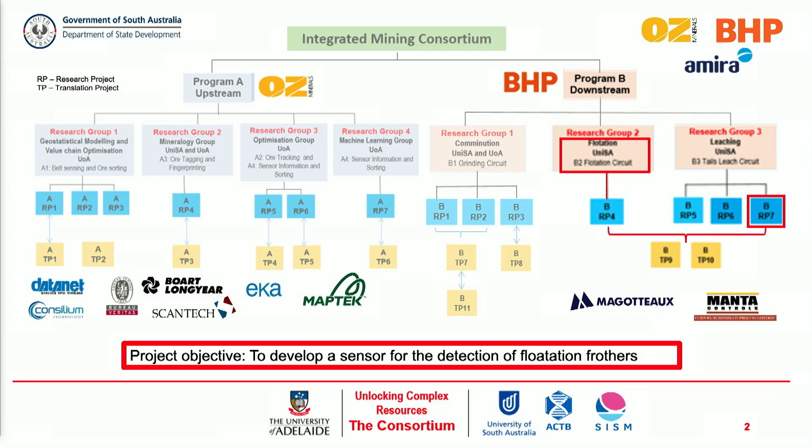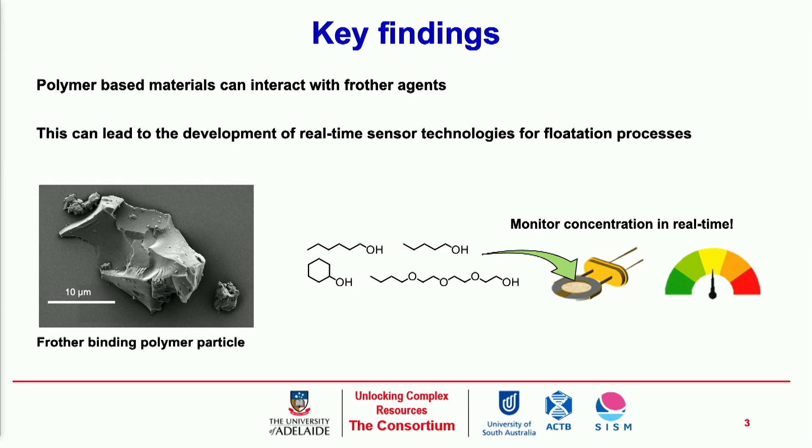the development of a sensor for the inline monitoring of froth flotation agents in flotation processes. So to date, the key findings of this research are that we are able to develop materials that interact with these key components of frother mixtures through an adsorption process. We've developed a series of polymers that we're evaluating for their binding properties to these components, and we believe that this will lead on to the development of a successful coating for a Quartz Crystal Microbalance platform for real-time monitoring of these components in flotation processes.

So briefly, an overview of flotation to a population of people who know more about it than myself. Basically, you have a bath full of bubbles, which are decorated with these hydrophobic components, and you have binding of copper sulphide minerals to these bubbles as mediated by an ethyl xanthate collector.

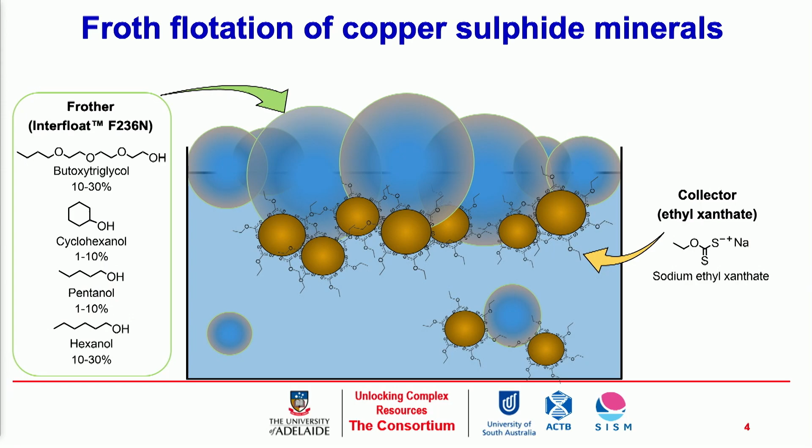What we rely on in how we're going to tackle this problem is based on molecular complementarity. So we want to develop a system where we have complementarity between the binding properties of our target molecules and the polymers that we create.

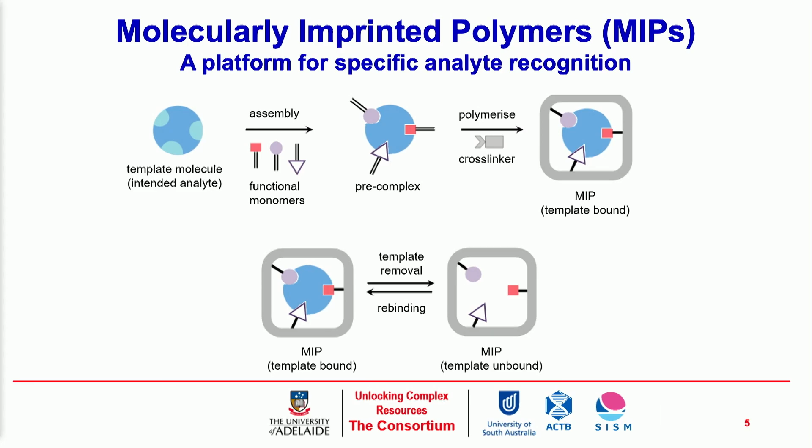And a typical way of achieving this within food industries is to employ molecularly imprinted polymers, where you'll take a template molecule and you'll select compounds that interact with key features of that molecule, and you'll polymerize a backbone based on that to form these sockets that will bind these components in solutions and allow for sort of gravimetric analysis if you then adopt that onto a QCM through a mediation of binding and desorption from these materials.

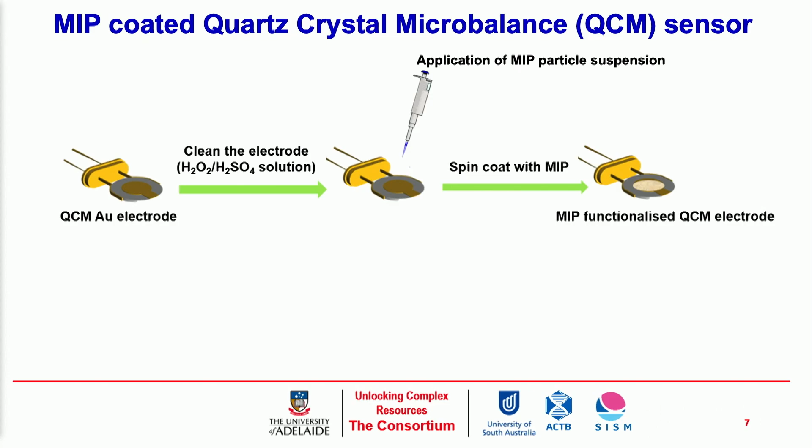So that's the central premise for how the materials in this project work. And then with successful materials being made, moving forward, we will coat these quartz crystal microbalances, and adsorption of these key molecules within the flotation baths with the substrate surface will induce a difference in the frequency of this monitoring system, which can be correlated to concentration in real time.

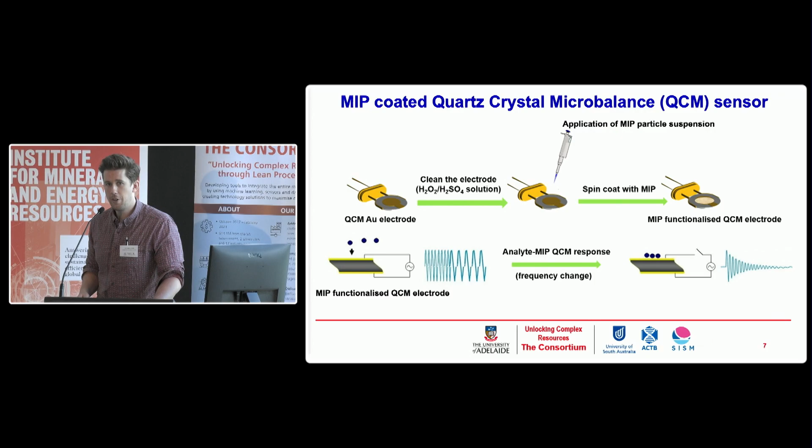However, the compounds that we're targeting here within the interfloat frother mixture are quite simple. They don't feature distinct chemical handles that have a high degree of specific complementarity to available monomers when we're designing and creating these polymers. Instead, they're typically straight chain or cyclic alcohols or polyglycols that feature a hydrophobic component. So really the only handle that we have to work here is their hydrophobicity.

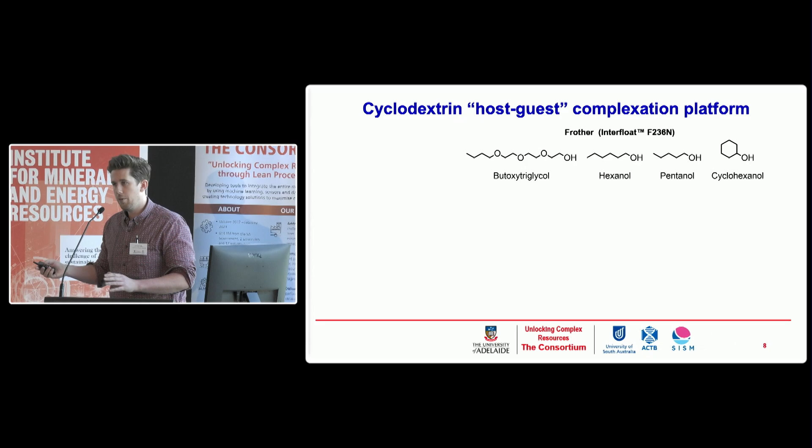Some other work that I do on medicinal chemistry projects uses cyclodextrins as a platform for various reasons. These are no strangers to the pharmaceutical industry. The benefit to using cyclodextrins is that they are polyglycosidal macrocycles, and they have a hydrophobic cavity orientated towards the inner circle. So like a hoop with a sensory ring in it that is going to bind each of these things. On the outside is a very hydrophilic rim that allows for access of simple chemistry to add on clickable handles

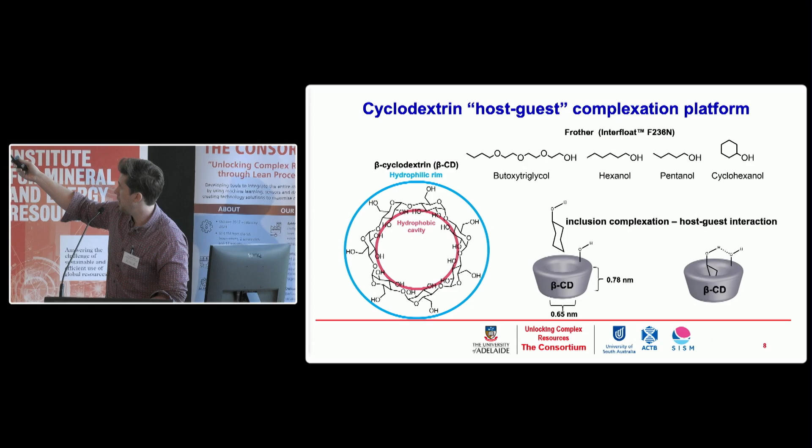or polymerizable groups. So we were able to take this as a platform and produce a material that's going to be able to interact with these components based on the formation of hydrophobic inclusion complexes, as demonstrated here with the binding of cyclohexanol within the cleft of beta-cyclodextrin.

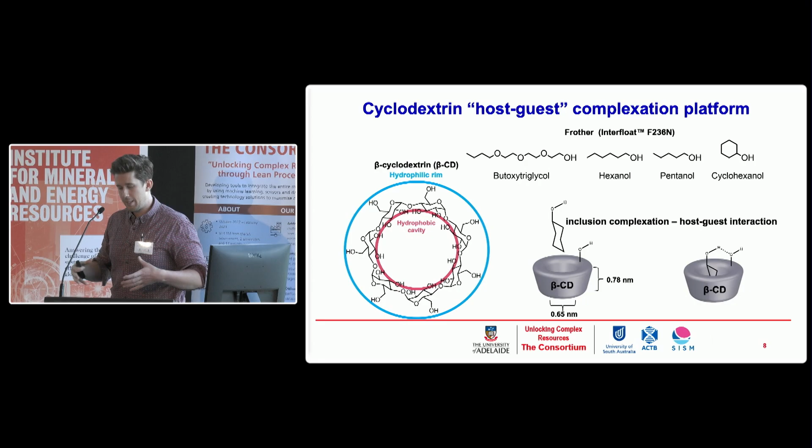Cyclodextrins have different sizes depending on how many sugars are in their ring. Beta-cyclodextrin was selected as we believed it had a good size complementarity to cyclohexanol, and we were kind of hoping that we might get some degree of selectivity for that component just based on that steric bulk. We didn't really achieve that, but that's life.

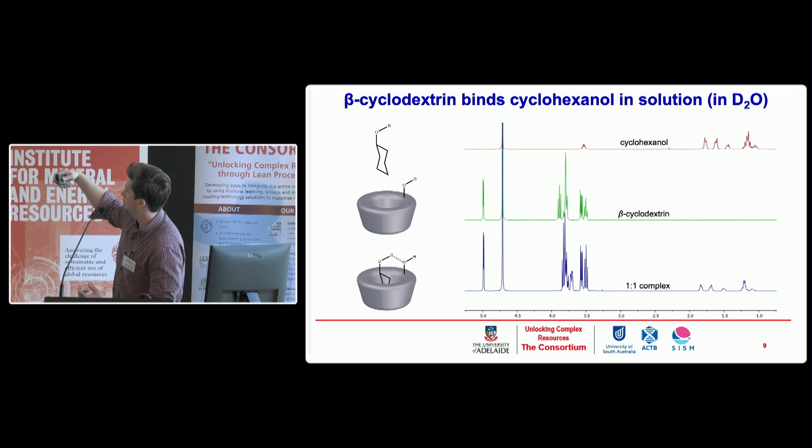So here's some nuclear magnetic resonance spectra of beta-cyclodextrin and cyclohexanol, and these are just to demonstrate the principle of binding. Basically, in the red trace, you have the protons relating to cyclohexanol. In the green, you have beta-cyclodextrin. And then when you mix them together in blue, you can see a shift in key resonances which correlate to the H3 and H5 protons of the sugars within the ring that make up the hydrophobic surface of beta-cyclodextrin. This is a means of confirming that you have complexation with your host molecule, your guest molecule within your host.

So we screened all the components that are in the Interfloat mixture and could determine that of the 4 that we're targeting, they form these complexes.

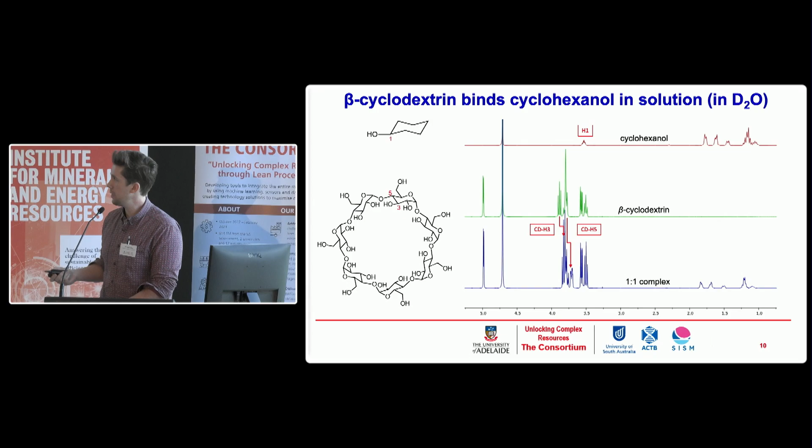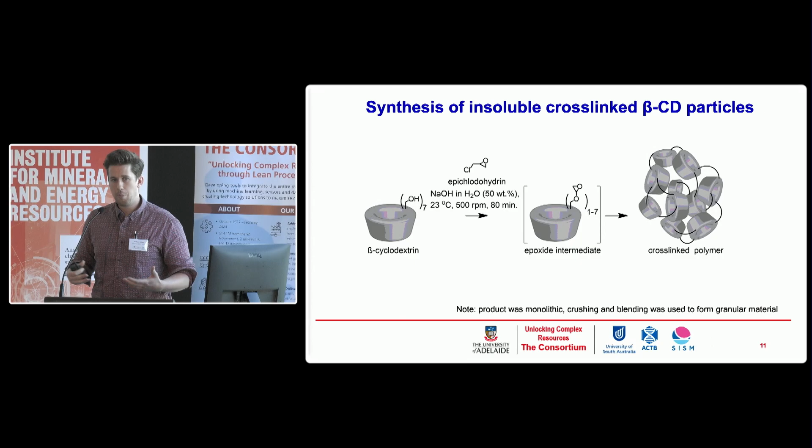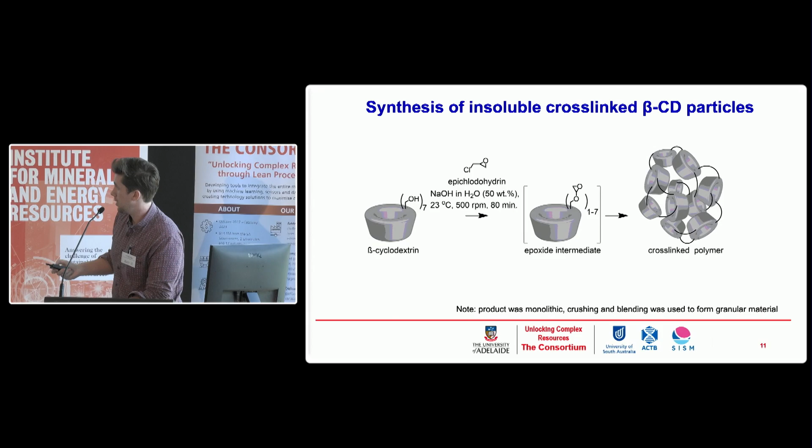The next step is you need something that won't just dissolve in water like beta-cyclodextrin does, and you need a viable material platform that can be taken forward for binding and development onto the Quartz Crystal Microbalance system. To do this, I formed a highly cross-linked polymer network using epichlorohydrin, creating a reactive epoxide intermediate from the beta-cyclodextrin unit, forming this highly cross-linked but porous, water-insoluble polymer, which looks like this on the right-hand side.

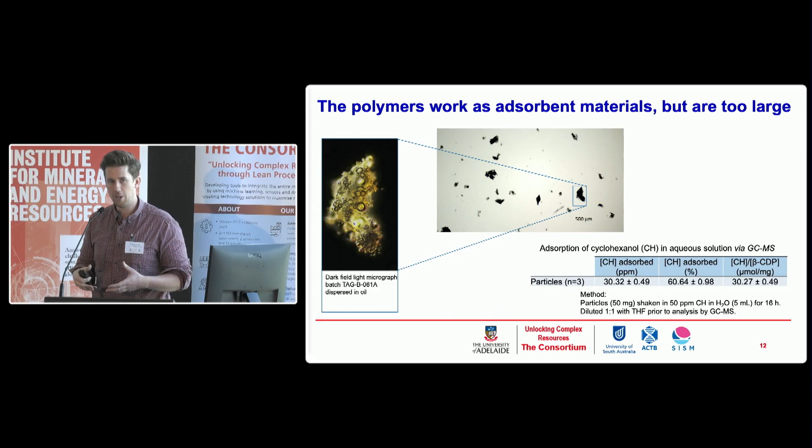When we first made these, it was produced as a large monolithic structure, which required a lot of grinding. It was hard to work with, and these were quite large, which ultimately wasn't suitable for further adaptation down to the Quartz Crystal Microbalance system.

But we started to evaluate their adsorption properties, and we can see that they're interacting with the components we want at a scale that would be useful.

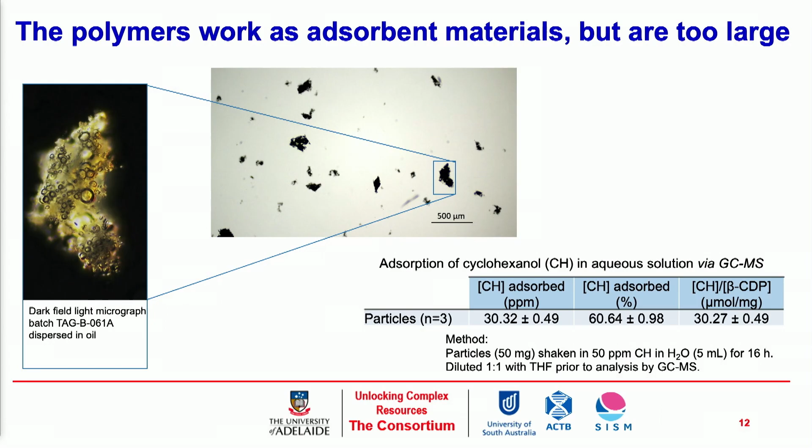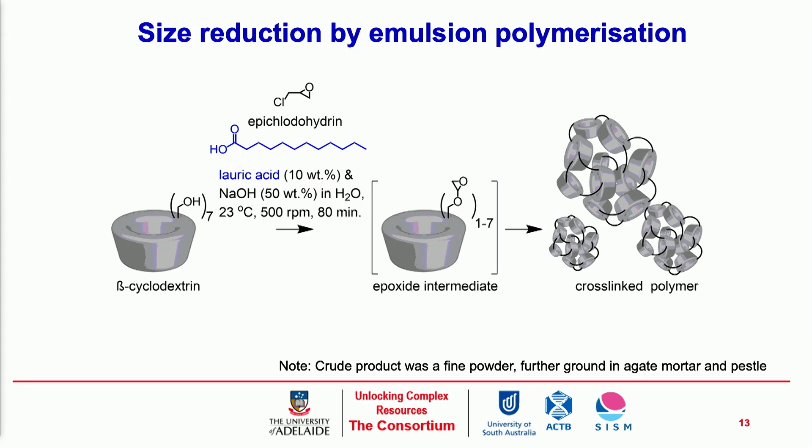So the next step was to try to reduce the size of these particles. I introduced an emulsifying agent, lauric acid, into the synthesis, and was able to form it as more of a particle suspension. So rather than getting a big block at the end, I got a collection of fine powder.

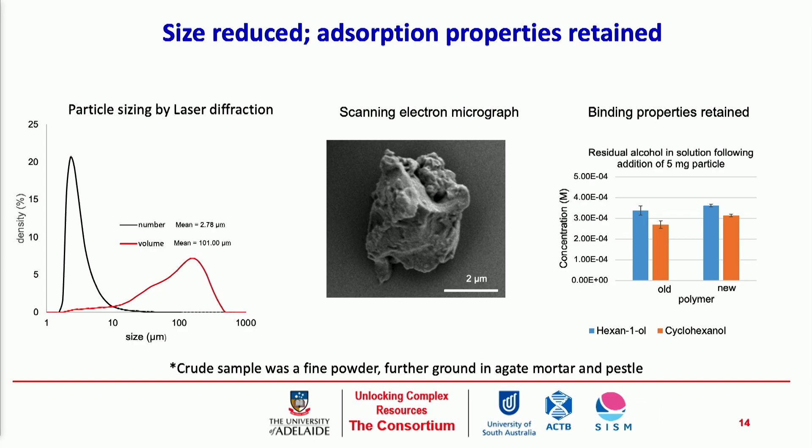The properties of adsorption are retained in these polymers, and with ongoing work we're trying to reduce the size of the platform, still using cyclodextrins, to achieve smaller particle sizes. We've been evaluating them under different conditions like temperature and pH, seeing how that might modulate selectivity for individual components of the Interfroth mixture. With future work moving forward, there are several things to be achieved.

Ultimately, I'll continue to evaluate the performance of these sorts of materials. Overcoming size constraints is still a major consideration.

To tackle this, I've recently been producing magnetic nanoparticles decorated with beta-cyclodextrin. This drastically reduces the size of the platform, but they retain the same adsorption properties, and you also have the benefit of being able to handle them magnetically, which can be a great benefit for processing time when evaluating these materials.

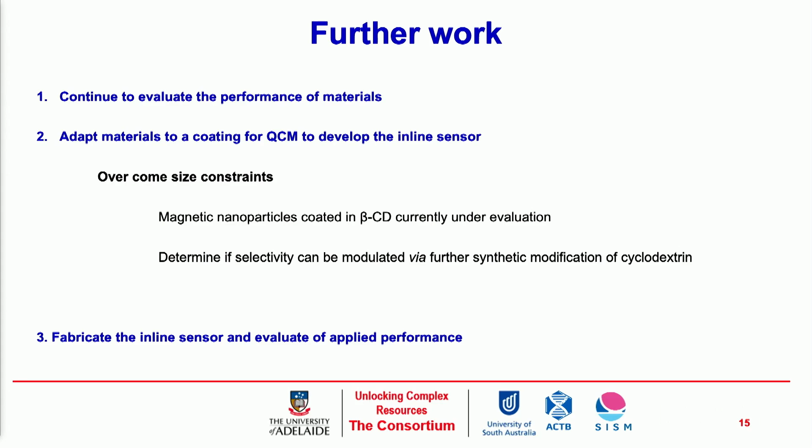I then need to determine if selectivity can be modulated somehow for these systems. It may be a limitation if we're detecting too many things at once within a solution, so having some selectivity for individual components would be a benefit.

I may be able to achieve this by possibly substituting out the cyclodextrins or modifying their rim to cause some sort of exclusionary basis for selectivity. Once we have a suitable material, we'll then move towards fabrication of the QCM for inline sensing and assess its performance.

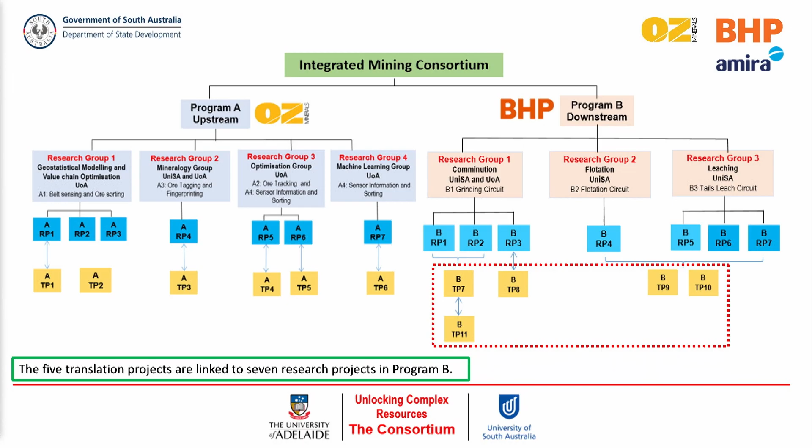But with current advanced techniques and instrumentation, we can develop more sophisticated approaches which simplify the human-process interface and help maximize metal production. In Program B, we have 5 translation projects linked with the research projects in the consortium that you've heard about throughout the day. These projects span from the grinding circuit down to the tailings circuit and are led directly by our translation partners, Manta Controls and Magotteaux. The first two, TP7 and TP8, are led by Manta Controls, and projects TP9, 10, 11 are led by Magotteaux.

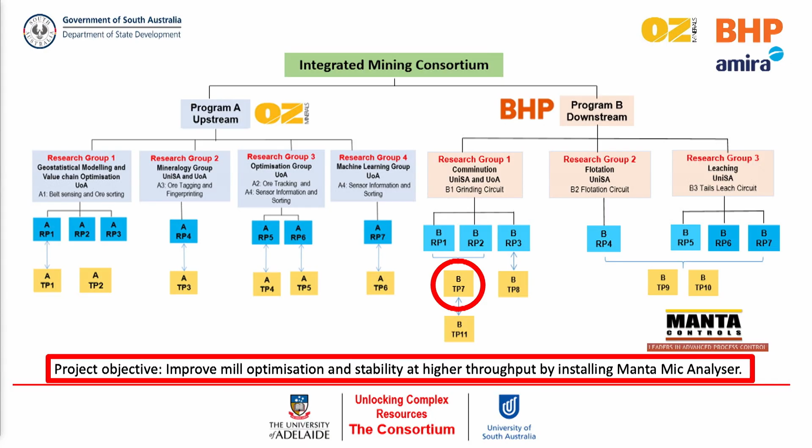Within the comminution group is translation project 7, focused on improving autogenous and semi-autogenous grinding through optimization and stability of the process, and maximizing mill throughput by installing an acoustic sensor, specifically the Manta mic acoustic analyzer, in the grinding circuit. Why is this important, and what are some of our key findings so far? We've been able to locate a position in the grinding circuit to install the acoustic sensor, which is important because the location determines the information we can get and its usefulness for controlling the grinding circuit.

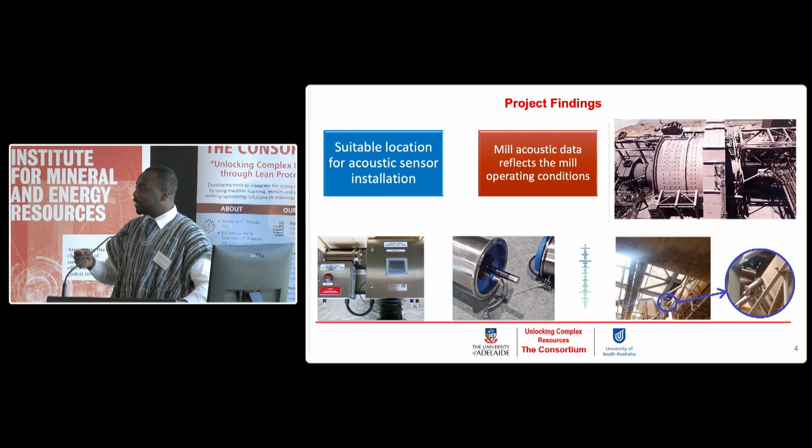We've also done preliminary studies establishing relationships between the acoustic sensor data obtained from Manta Controls, where we have about 33 different acoustic frequencies from operation, and mill operating variables such as mill weight and mill speed, among other things I'll go into further as I go through the presentation.

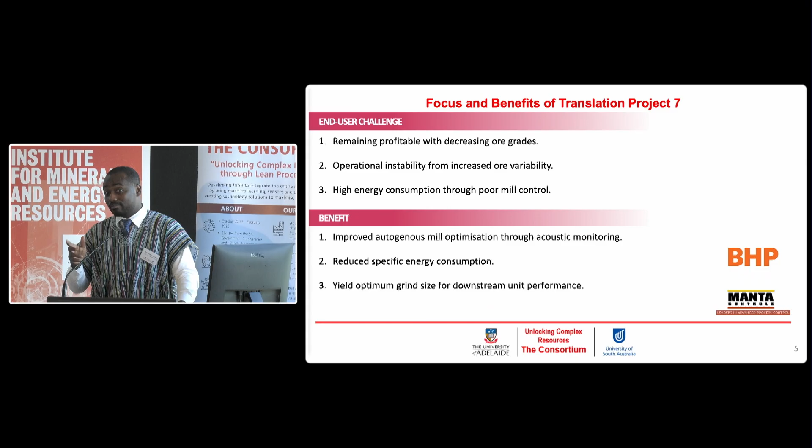So we need to maximize our throughput, which is very important. As was mentioned earlier by Kweku, the grinding circuit represents a very high energy consumption section in the mineral processing chain, consuming the greatest percentage of energy when milling. That means if we increase our throughput, we reduce the specific energy required for that processing.

The other challenge is operational stability. It's very difficult to maintain a stable operation, mainly due to varying mineralogies or ore characteristics fed into the mill. For example, you may have a hard ore fed into the mill and use a specific set of operating conditions. When the ore gets softer, that condition is no longer suitable, so you need to vary it, and that causes instability in the operation.

So sometimes in a typical load-to-power curve, which is used to monitor the performance or stability of the mill, every operator wants to make sure they're working below the point where it tips into the unstable region, so that you don't fall off. That also means you are not meeting the maximum capacity of that particular operation.

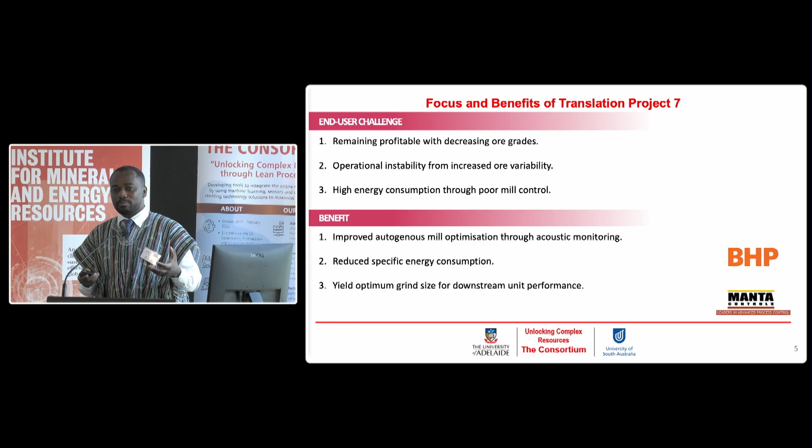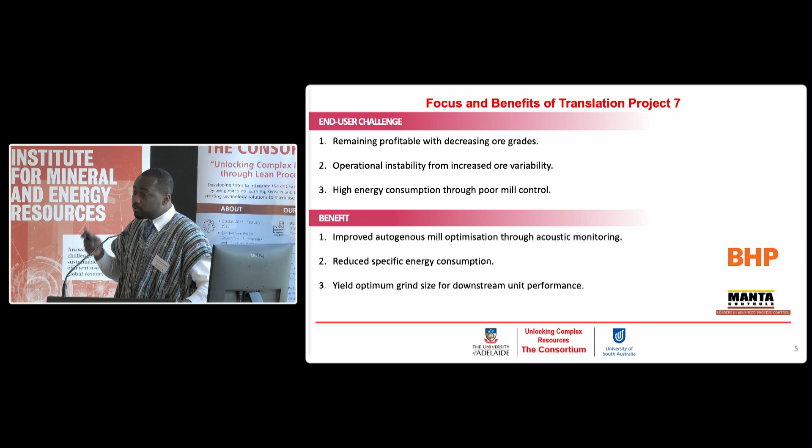These are major challenges, and we're anticipating that by installing this sensor, we can collect useful data to help improve the optimization of the autogenous mill, reduce the specific energy, and achieve an optimum yield of particle size, which is useful for the downstream operation.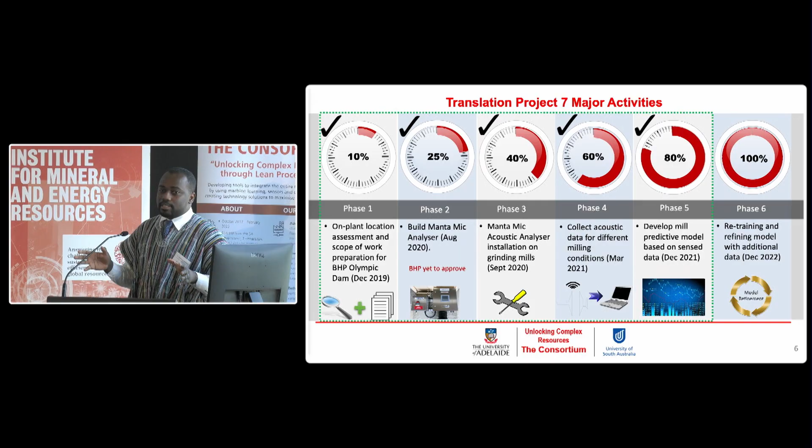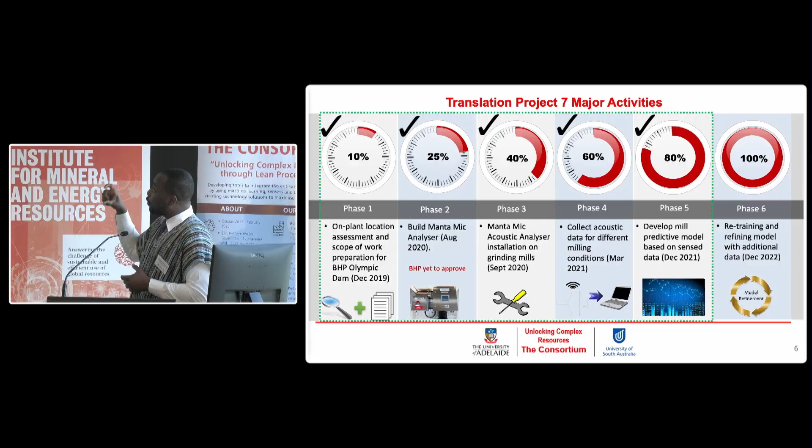This translation project has been divided into 6 major phases. The first is to assess the location on plant, going up to phase 5 where we're currently developing the models. We've done preliminary work on that, and I'll share some of what we've seen.

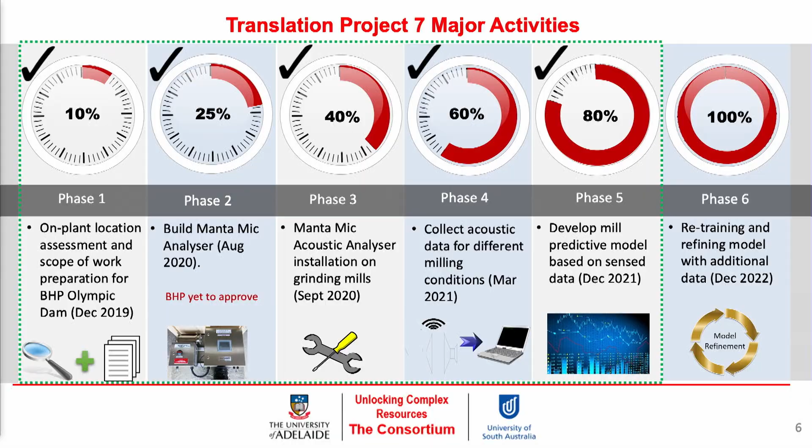Then also to build the Manta mic, install it on site, and collect data from that to use in building the models. Phase 6 mainly involves collecting additional data, refining the models, and getting better information from that.

This shows the location. At BHP Olympic Dam, which has been our main focus, there are 2 primary mills: the Fuller and the Svedala mill. The Fuller mill treats a maximum of about 400 tons per hour of material, while the Svedala mill treats about 800 tons per hour.

So our focus will be on the Svedala mill, and we've assessed that we can have 2 microphones on the mill, one at the eastern and one at the western part, because that mill operates in 2 directions. So when running clockwise, we're still able to get information from the toe of the mill, and when running anti-clockwise, we can still get useful information.

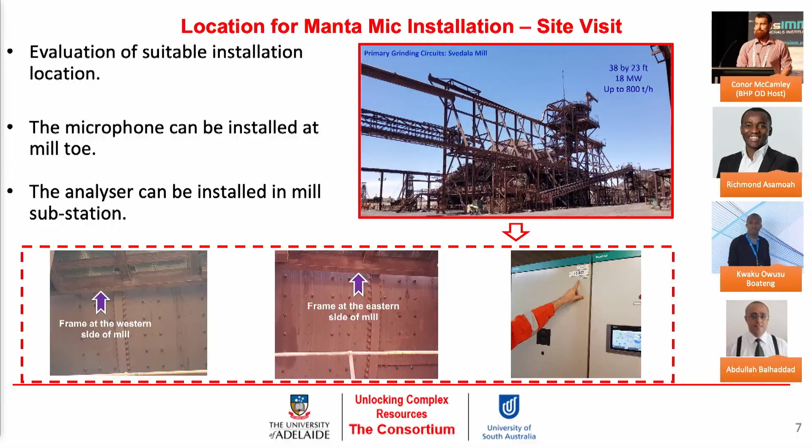For the analyzer, that will be installed in the substation. That was successful. The other thing we've seen from the preliminary data is that we're able to use the frequency data to correlate or link it with the mill operating conditions, such as the mill weight and the mill speed.

That's very important, because some of the things Kwaku shared about changing ore feed characteristics—where the hardness is seen in the acoustic information, or the sizes are seen in the acoustic information—we can now probe further into those regimes or phases and work on plants to get that information.

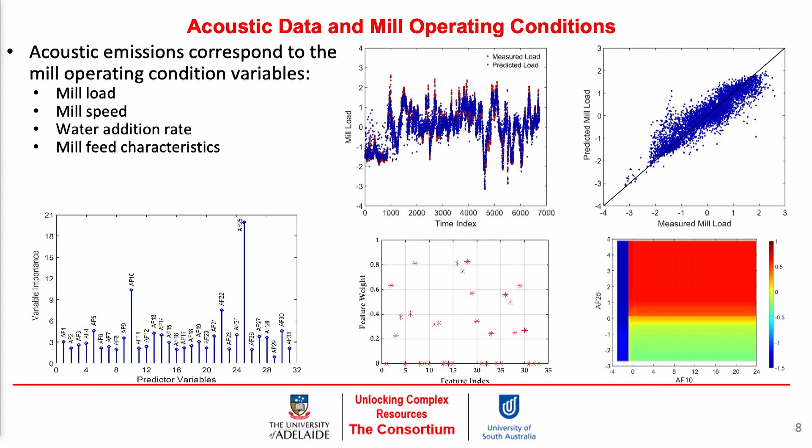So I'll now move, still within the grinding circuit, to translation project 8. This project is also led by Manta Controls, and the focus is to install a particle size monitor on the hydrocyclone overflow.

This is very important because particle size is one of the major variables that every metallurgist knows is critical in downstream flotation, or even if you go straight to the leaching circuit. But monitoring that on site has not been very frequent. Having a sensor that can monitor particle size continuously in real time, and using that information to feed back into the control system, is very important.

In terms of flotation, you are trying to work within a particular range, say 30 to 106 or 150 microns, which is best for flotation based on the mechanical cells used on plant. But when material is too coarse or too fine going to flotation, you end up losing it to tailings. So you have to be able to monitor the particle size.

Usually on site, what is done is you monitor mainly one value, the P80, which is the 80% passing size - say P80 is 75 microns. An operator monitors just that single value and assumes a particular outcome in flotation. But flotation is more sensitive to variation in the distribution of sizes, which will yield a different outcome. So having knowledge of the distribution is also very important, not just a single value.

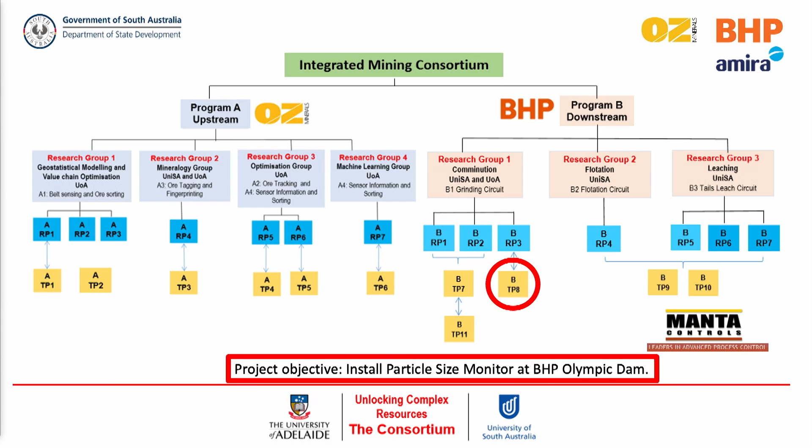On-site measuring of particle size is also difficult because it's laborious and manual, meaning more cost. So having a sensor that can do that is very useful. This is the purpose of this work, and it's directly linked to the research project B3 talk you listened to this afternoon, also led by Manta Controls.

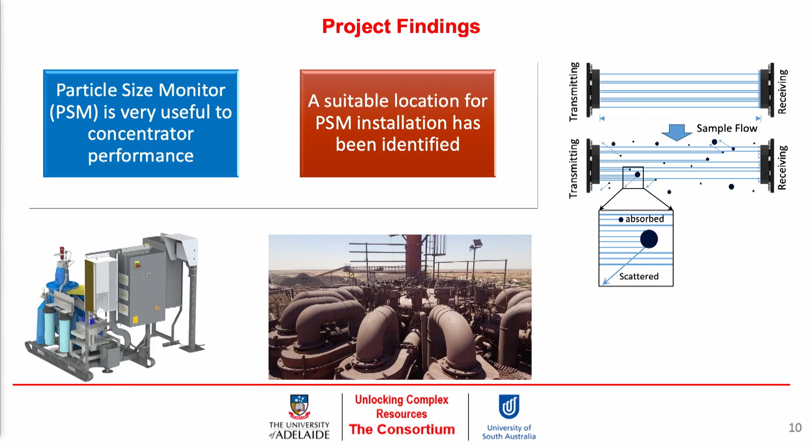So what are some of our findings? We were able to identify a location on plant where we can install the particle size monitor, after searching for a suitable location - I'll show you that in a few minutes. But this work also focused on addressing key end-user challenges.

The first challenge is decreasing ore grades - I won't go back into that since we talked about it earlier. Also overgrinding: in the hydrocyclone, the focus is to separate fine particles into the downstream process through the overflow, and coarse particles back into the mill. When the cyclone isn't performing properly, you end up with coarse particles reporting in the overflow.

That is typically referred to as roping - coarse particles report in the overflow and fine particles report in the underflow, going back into the mill. When that happens, the amount of new feed you can put into the mill reduces, so you're reducing mill throughput and overgrinding that fine particle, which eventually goes to flotation and then tailings because it's too fine to be separated. So you're losing material, losing energy, and spending a lot of money.

Being able to monitor that hydrocyclone overflow is very critical and important. Also, intermittent poor flotation response is a major challenge, because when feed varies based on particle size, pulp chemistry, or mineralogy - as was also mentioned today - you tend to get poor flotation. This challenge was the main focus to be addressed with this translation project.

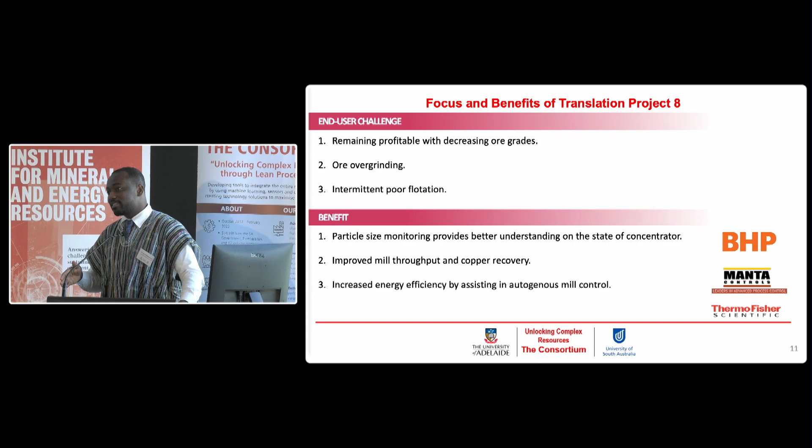We anticipate that by installing the sensor on site, we will be able to know the state of the concentrator at a particular time - is it working properly, do we need to adjust something, do we need to increase the density of the feed going to the hydrocyclone, or do we need to maintain the hydrocyclone? That is some information we can get from this.

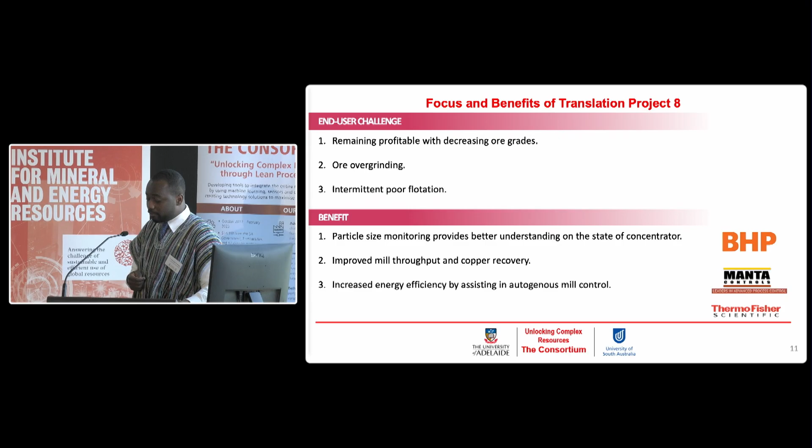We can also improve mill throughput and copper recovery. Like I mentioned, when coarse particles that should go back in end up as fines instead, you can't get more material through. By installing this, we can have a better grip on that and also increase energy efficiency - achieving higher throughputs and reducing specific energy consumption in the grinding mill.

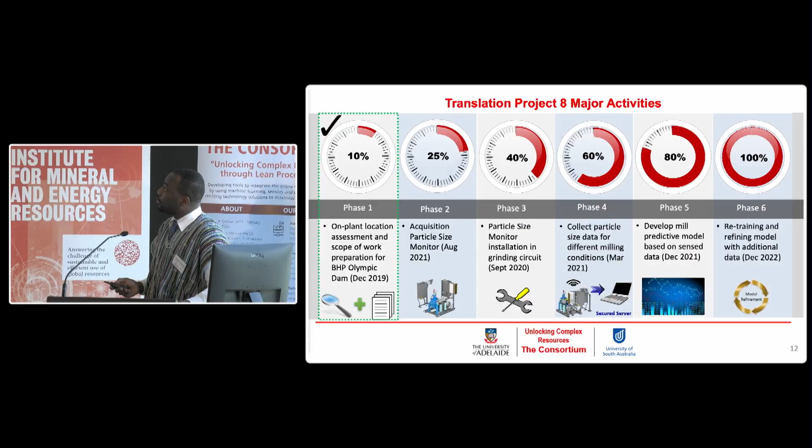So again, this work was also divided into 6 main phases.

The first one was to look for a location on site where we can install the sensor, which has been completed and successful, and then acquire the sensor and install it on site and collect data from that, build models that are useful that can be fed into the control system, and then continue to retrain that model with additional data sets.

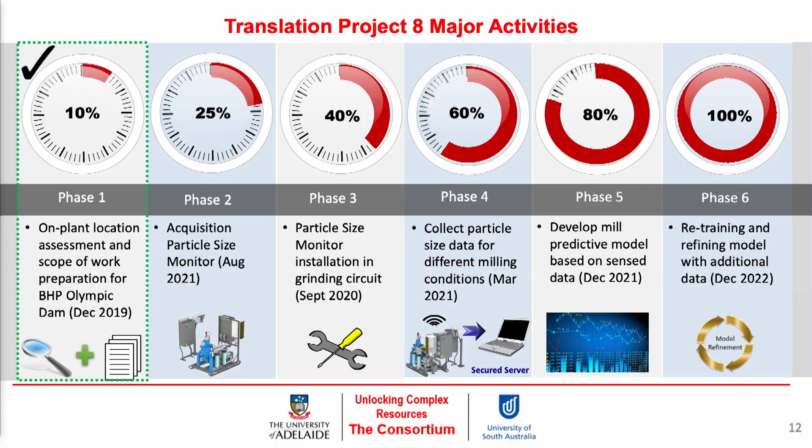Now, the 2 translation projects are led by Manta Controls. Manta Controls already have their Manta Cube at Olympic Dam, so linking all these into the control system is pretty easier. So this is on the location for the particle size monitor.

Initially, our primary target will be the Svedala mill. We'll focus on that circuit overflow. But we investigated each circuit, the fuller circuit, the Svedala circuit, to look for a location for each of them. And we also checked the...

OSA sample, where everything goes in and samples are taken for the particle size, for this assay. So we checked that as well, and we realized that ahead of the trash screens appeared to be the best option. And that was also good because we had other services like the water required to feed into the sensor and other things very close.

And also, again, we can now at that point measure not only the fuller circuit overflow, but also we can measure the Svedala circuit overflow. And that is very good. So we can use one instrument at that point and measure two streams at the same time.

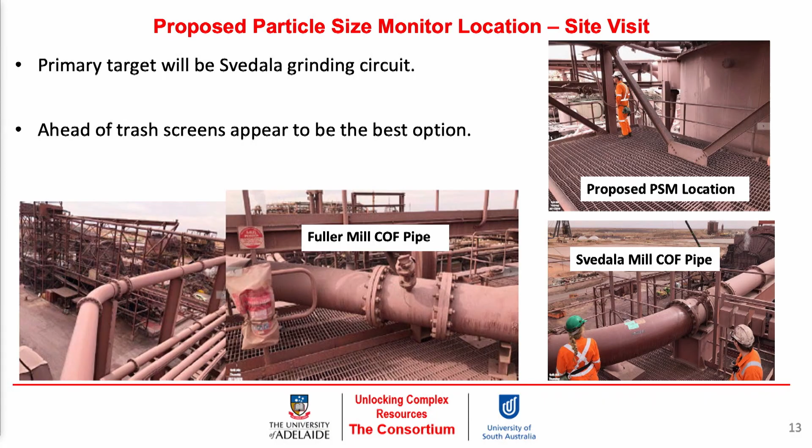I'll move on because of time as well to the Translation Project 9. This Translation Project 9 is led by Magotteaux. So I'm moving on to the Magotteaux-led projects.

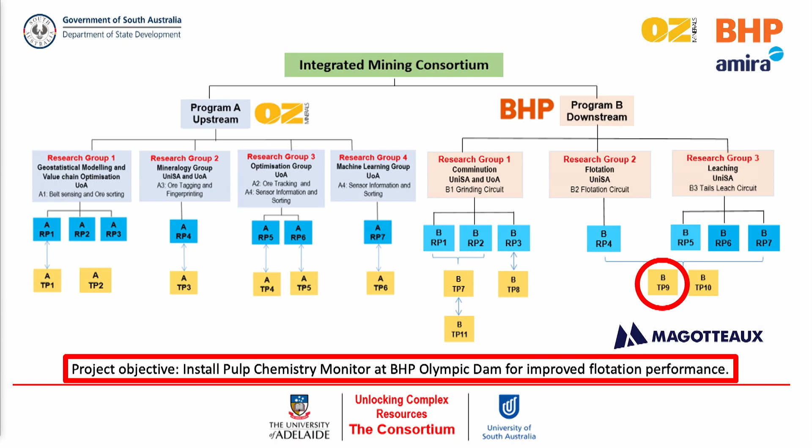And this project is focused on installing the pulp chemistry monitor in the flotation circuit, and then to improve the flotation performance. So major findings for this includes we've been able to install the pulp chemistry on site after assessment of a suitable location. We've also received an initial data set for the pulp chemistry data.

And also I'll show you some things on the model selected variables which we use in the predictive analysis and how it is important to know which variables are selected for the input for the predictive model and its robustness or reliability of the model.

So again, this project focused on addressing key challenges such as less predictable flotation response. As I mentioned earlier, won't dive into that. Currently, again, on site, these variables or sensors, for instance the pH, are being measured on site, but not more frequent, it's less frequent. So having a proper instrumentation on site which can be used to measure the pulp chemistry, specifically looking at the pulp pH, the redox potential, dissolved oxygen, the oxygen demand, and temperature, will be very useful.

And again, poor interplay between copper recovery and target grade. So for instance, if we take the smelter, there is a target grade that is required for the smelter. So it's difficult when you have unstable operation to be able to meet that target grade and also meet a particular feed mass or recovery. So having a sensor in place that can help us have a better grip on the flotation circuit will be very useful.

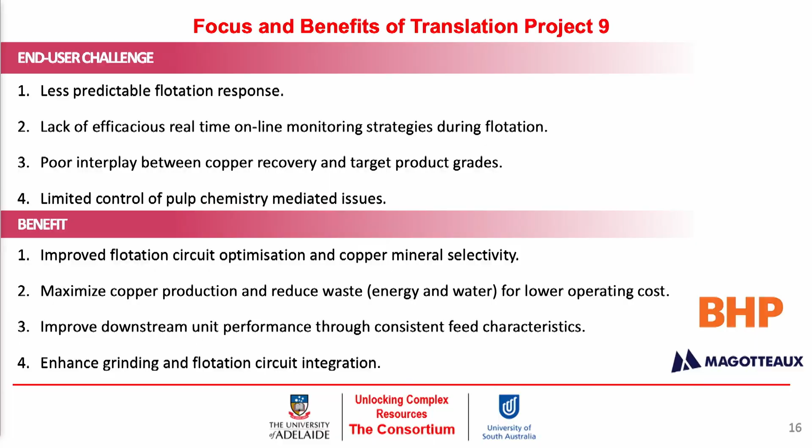Previous work done at UniSA has shown that you could have heteroagglomeration between gangue minerals, for instance chalcocite and sericite. Fine chalcocite and sericite going into the concentrate or froth zone, and that is dependent on the pulp chemistry. So knowing the pulp chemistry, and again the change in feed mineralogy which is responding in the pulp chemistry, using that information to dynamically control the flotation circuit will be very useful.

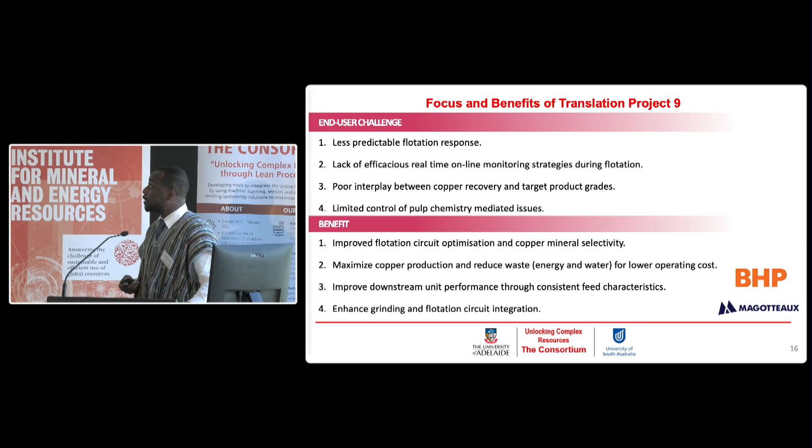So having this sensor on board will be addressing issues such as improved flotation circuit optimization, copper mineral selectivity, maximizing copper production, and reducing waste in energy, water, and reagents use, which lowers the operating cost, and also improving downstream unit performance through consistent feed going downstream. A change in mineralogy in the feed going to downstream can have a huge impact on the downstream unit performance, and that's something I've studied as part of my PhD as well.

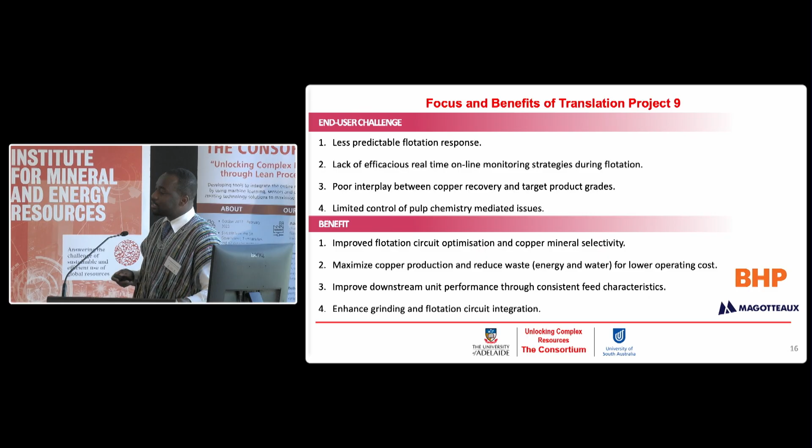So an enhanced grinding and flotation circuit integration. Once we have these sensors on board, we can better integrate both the flotation circuit and also the grinding circuit.

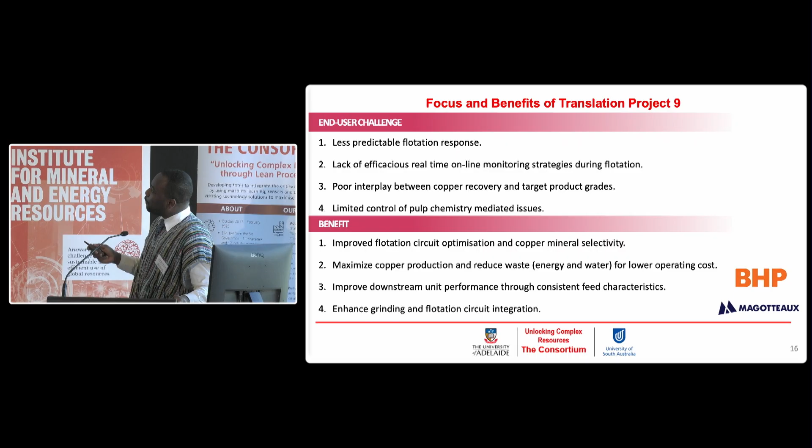Before I go on from here, a new development with the pulp chemistry sensor is that it's now being renamed. So previously it's a pulp chemistry monitor, now it is called Magopulp. We can talk about that afterwards.

So, but this project is all divided into 5 major phases. We've been able to complete up to phase 4, where we're developing initial models. We've installed that on site and also have collected data, which is being used as part of work that Bismarck is doing as well, developing predictive models.

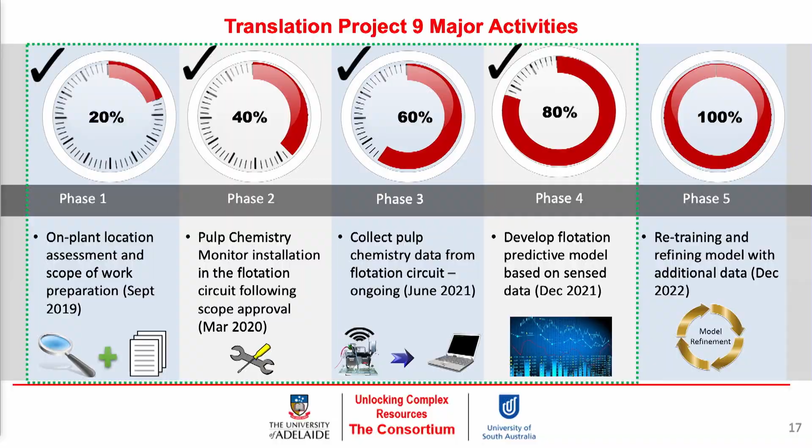So this is where the pulp chemistry monitor is on site, in a rougher circuit. So when you get the chance to go to BHP Olympic Dam site, try and pass through and see it running, very busy, working, collecting pulp chemistry data.

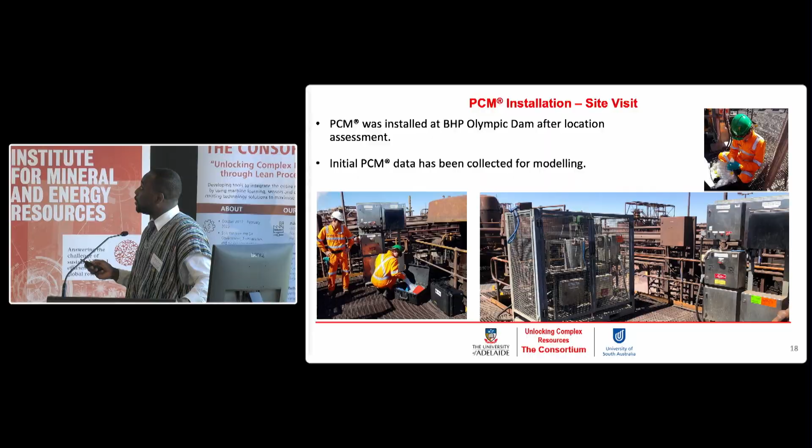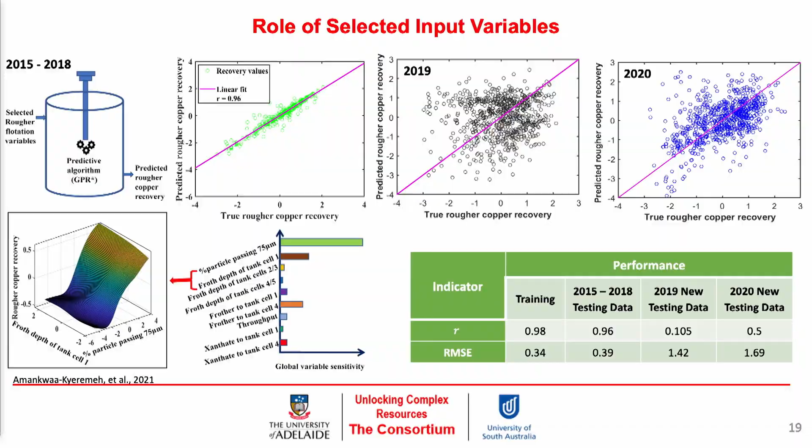So the causal relationship between the variables used and their response, the target variable we are trying to measure, matters. Getting the pulp chemistry sensor on board, knowing that pulp chemistry also plays a role in target recovery, will be very important and useful.

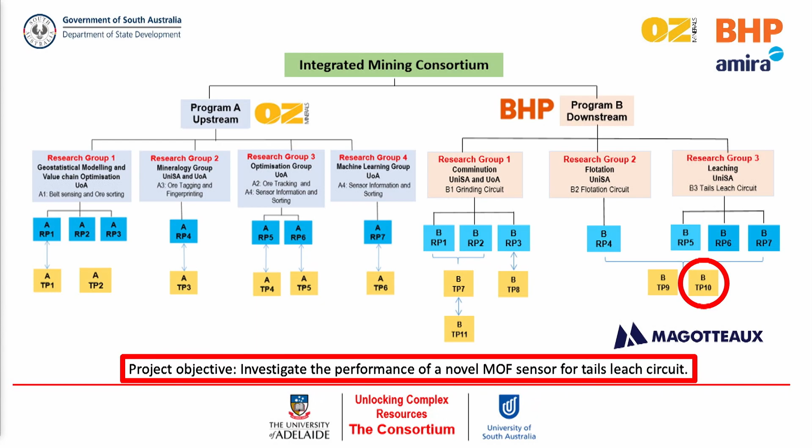I'll go straight to Translation Project 10, which seeks to investigate the MOF sensor, metal organic framework sensor, that was presented this afternoon, in real leaching systems and for the tails leach circuit. We've been able to design a new reactor system at UniSA which we'll use for the real system leaching, to mimic the on-plant studies, and also to investigate the effects of pulp mineralogy on the leaching process.

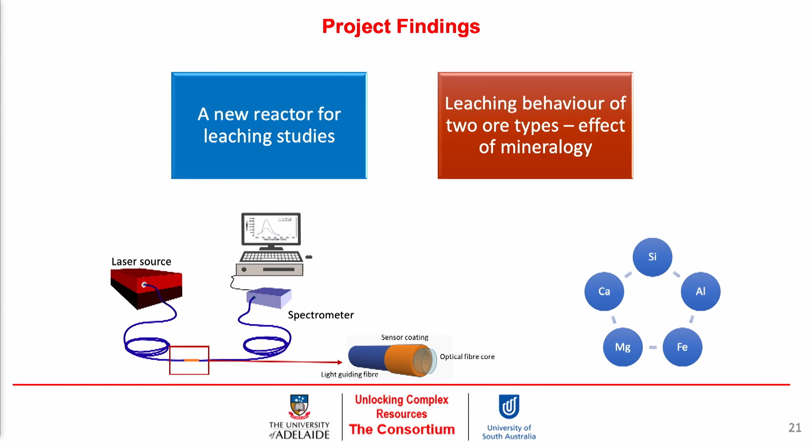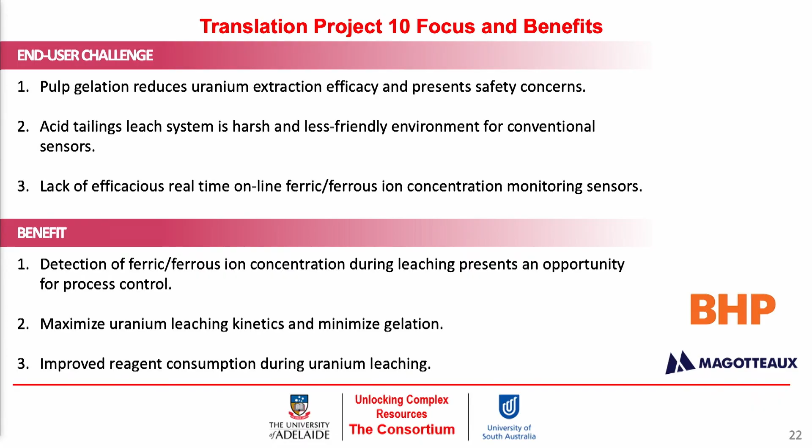This translation project addresses key challenges such as pulp gelation, which is very important because in uranium leaching you need ferric ion to help oxidize the uraninite, or uranium mineral, in the leaching process. But if you don't have enough ferric ion, usually what's used to detect or monitor that is the redox potential, but the most critical parameter is actually the ferric ion.

So on plants, you end up dosing a lot of oxidants to move up the redox potential to reach a particular target value. But when you do that, you're now leaching at very aggressive conditions, which can cause other species to dissolve in solution, enhancing pulp gelation. That's a major issue we're trying to properly monitor with a sensor of this sort.

Currently, because the leaching environment used for uranium is highly acidic, pH 1, and at high temperatures, you don't have a suitable sensor that can be installed or used to monitor this continuously - it will just break down. So having a MOF sensor that is very effective in that system will be very useful and can help in controlling the process.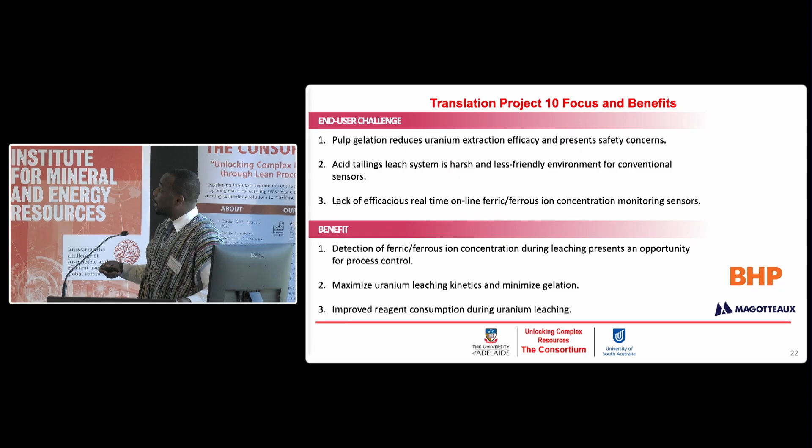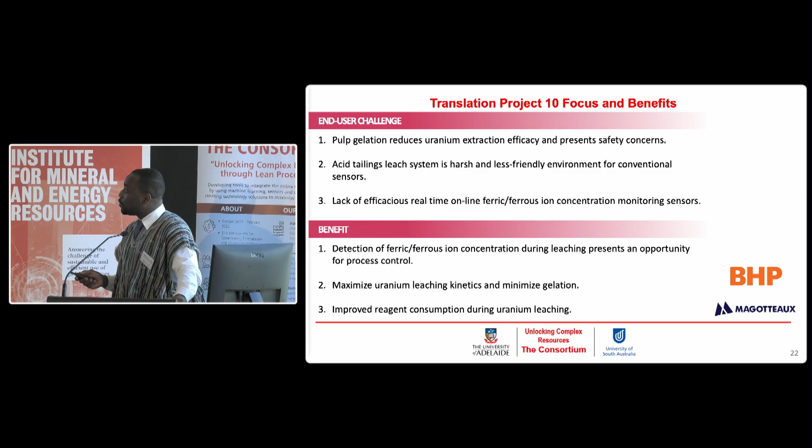That links directly to the benefits we can get from this translation project: to maximize uranium leaching while reducing gelation, pulp gelation, and also have proper monitoring or detection of ferric ion concentration, or the ferric-ferrous ratio, and use that in process control of the leaching circuit. This will also definitely benefit reagent addition.

For this translation project, we divided it into 6 phases as well. The first was to get a lab-based leaching rig on site at UniSA where we can run experiments similar to on-plant, mimicking what is done in industry - that's done. We also did preliminary studies on 2 ore types received from BHP, which is also done.

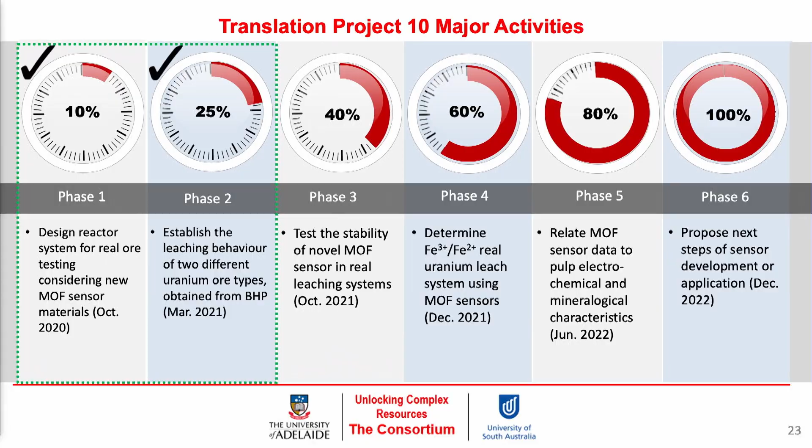So we're moving on to testing the MOF sensor once Linda has that ready to be tested in the real ore system, and develop that, then propose next steps after that test work and stability testing. This is how the leaching setup looks like.

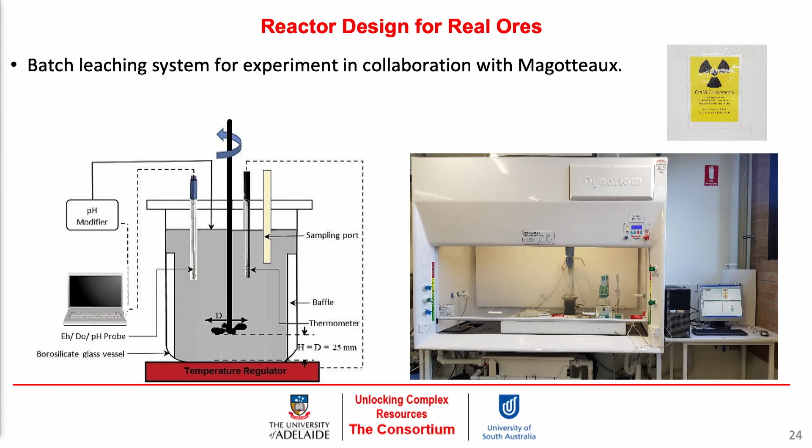We can monitor the solution chemistry while doing the leaching, and also at high temperature. We've done initial work, all in collaboration with Magotteaux. Initial work on the effects of mineralogy showed that the change in mineralogy between 2 sample types affected not only the leaching yield but also the rheological behavior, which varied for the two sample types.

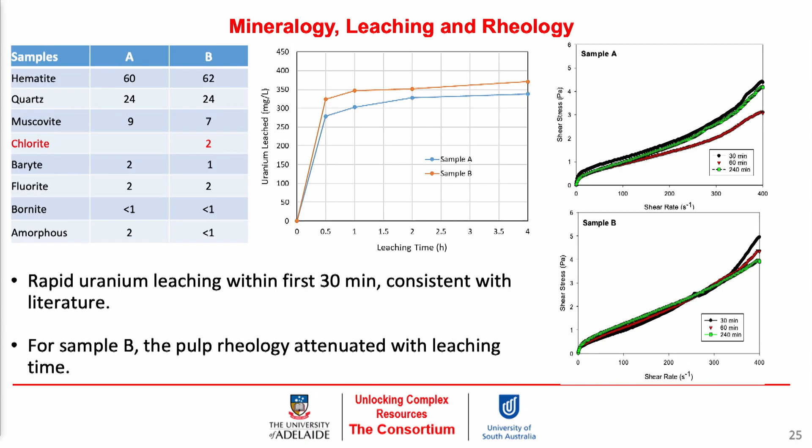I'll now move on to Translation Project 11, which is focused on developing a new laboratory AG/SAG mill that can be used as part of Research Project 1.

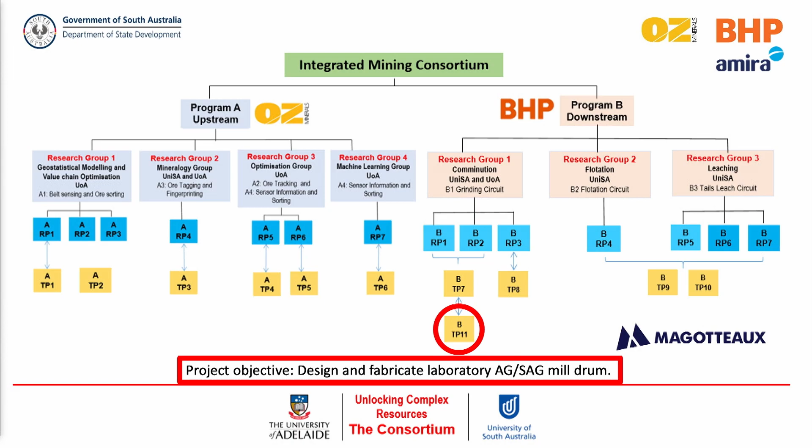So first of all, we've been able to design the SAG mill, and that has been approved by Magotteaux, fabricated, and installed at UniSA. We've also equipped it with a sensor, which is mainly what Kweku Owusu-Boateng in Project 1 has been using for his work, and it has been successful in commissioning that as well.

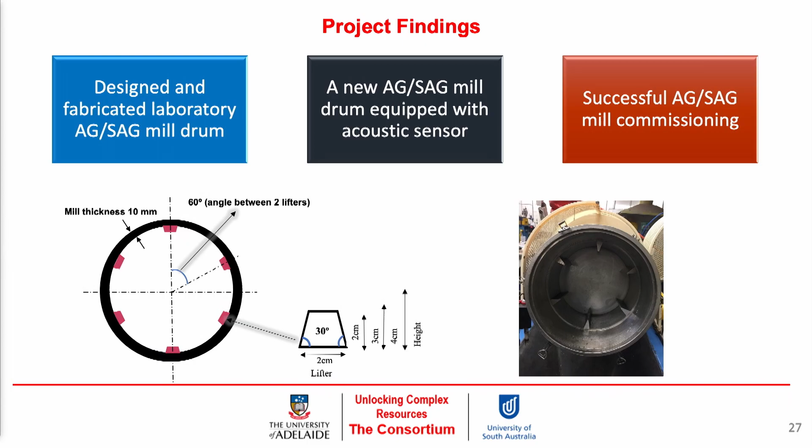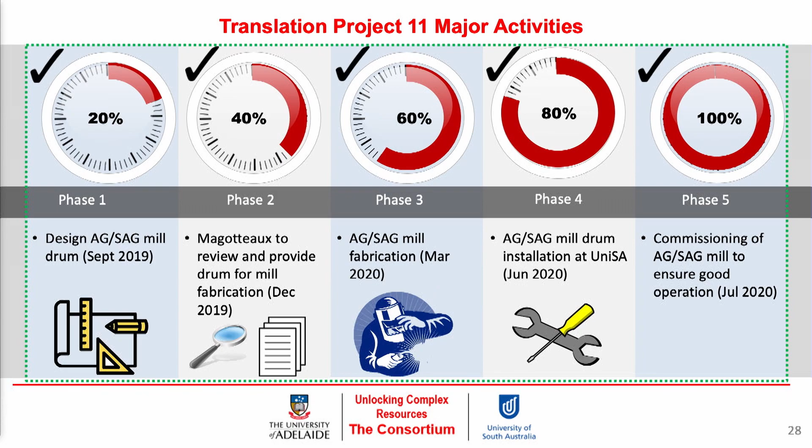So this project is complete. It started in 5 phases: designing the mill drum, getting it reviewed with Magotteaux, and fabricating it, which was successful. It's now installed at UniSA, and we had very good commissioning. As I mentioned, it's currently being used by Kweku for most of his studies at the lab level. So this is how it looks.

If you previously know the Magotteaux ball mill, it's not too different, but because it's a SAG system, we have a shorter length, around 15, and a diameter around 30 centimeters. The sensor is equipped at the toe of the mill, where we can measure information from the mill. This is very important, because on site we are not able to change so many things - you can't vary the conditions to see how that affects the process.

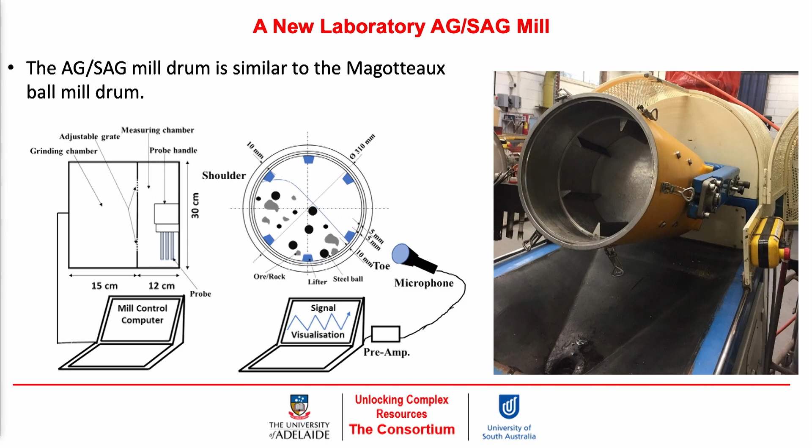But in the lab we can go the extra mile. So when BHP says, okay, check this for us or do that for us, we can definitely do that in this lab mill. The other thing is, being similar to the Magotteaux ball mill, you're able to monitor the pulp chemistry. So if that is important and relevant for a SAG system specifically, we can do that as well with this mill.

Like I showed you in the flotation modeling that we did, we can use the plant data, but the causal relationship between the variables is very important. We are collecting what is important, and from fundamental research done in mineral processing, there are variables that are very important and can have significant impact on recovery. Most of those variables are not measured on plant.

In real time, there are regular measurements done in most cases, but not continuously. So if we have these sensors on plant taking these measurements continuously in real time, and feeding into a given control system, we are better able to optimize the whole value chain. You're not only looking at the processing section, but also getting information from upstream, which can help us have a better grip on metal production downstream.

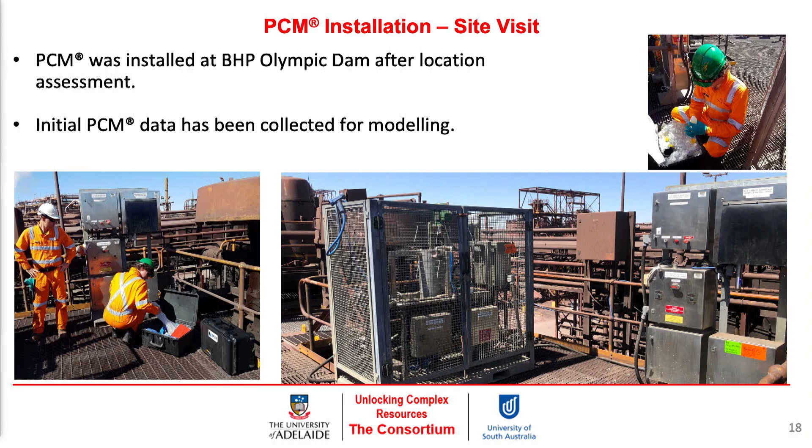I want to stop here because this is the pulp chemistry monitor, now the Magopulp. So if I go back a bit, probably here - what this does is you've got a chamber there, and the slurry goes in there and it's conditioned, and you take the measurement. So what Linda was talking about, where we could dilute that or move the pH up a bit.

So that gives us room to be able to do that and still take the measurement. Initially what we're doing with the translation project is to see whether, when Linda is done with her work and we put it into the real ore system, would that be stable enough? Would the sensor be okay to measure that?

Also, we're getting different types of samples with the help of Cathy and Vanessa on site, where we have high ion concentration samples which aren't typically processed on plant. We're trying to go to the extremes and see how that can affect the sensor. So that's what we want to do there.

In terms of engineering it into the site, we can do something like this, diluted.

One other thing I think Kirsten, Linda didn't mention with the low pH, was a transformation to another phase. So there was another phase which was more stable at a lower pH, but due to time she couldn't dive into that aspect. It would be very interesting to explore whether that phase can be able to measure the ferric ion as well.

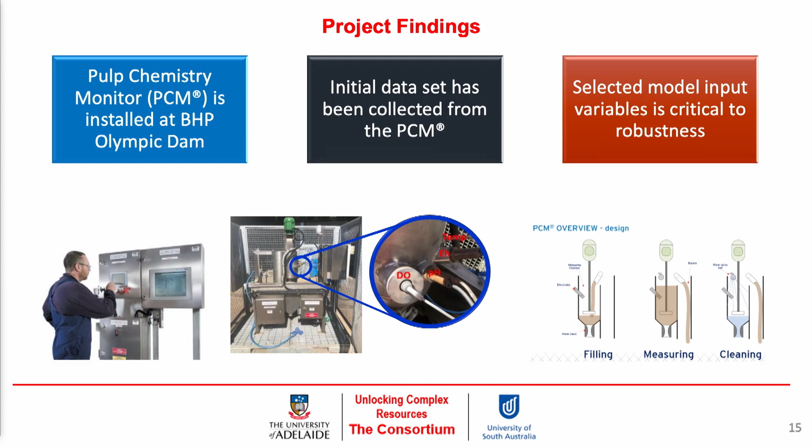Any more questions? I'm just going to ask you to comment, Richmond, on what were the biggest challenges in getting the translation projects to their current stage?

I think everyone now can blame COVID.

It's been one of the big challenges getting to site, especially last year. When COVID came up, going to site became very difficult, and it's understandable that getting the sensors up and changing things as required delayed us a bit. But like Cathy mentioned, having the right conversations ongoing with the plant, knowing what is required, what they need, has also been very good. So a major challenge affecting us has been COVID-19, and that has delayed a lot, but with the extension we've received, that is anticipated to be addressed going forward so we can get a lot done.

Yeah, indeed, we hope so. That was the basis of the extension request, and it's been granted, and we've still got 15 months to get data. So let's see. Thanks, Richmond.